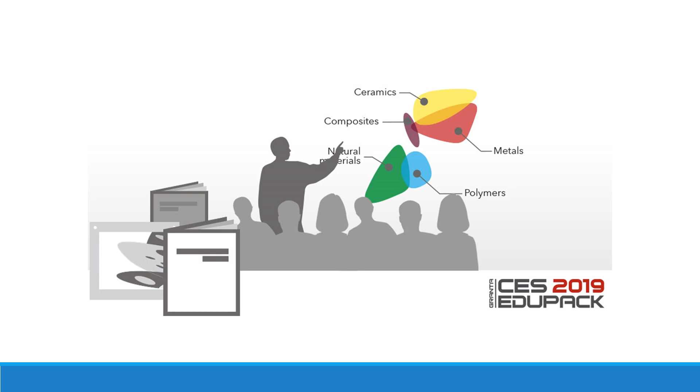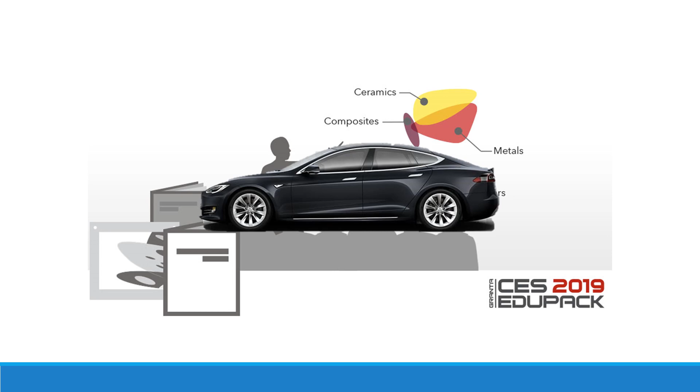Today, we are going to be looking at the material selection process of a part that is present in almost every car, either in the trunk or in the hood. We will go through the functional requirements as well as the intended application for this part that we considered for the material selection. After we reveal the selected material, we will walk you through the specific heat treatments and strengthening processes, as well as the finishings that are beneficial and required for this material.

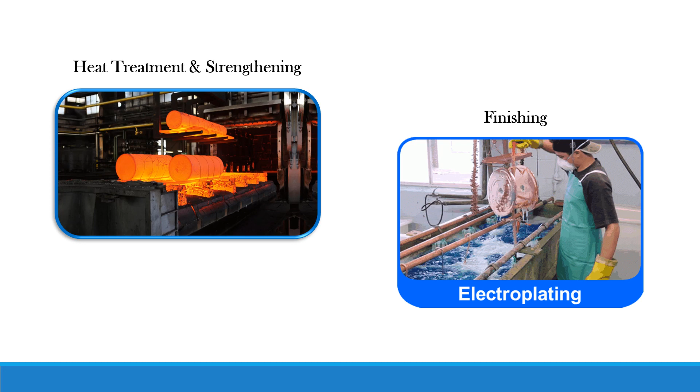The overall aim of this process is to analyze a design in relation to its standard operating environment, as well as the potential for environmental degradation. And this study highlights a thorough material choosing process that culminates in the selection of a material that satisfies the highlighted constraints and will result in optimal functionality of the part.

Under the constraints of transportation, we are going to be looking at the lift support struts that hold up the hatch of a vehicle. These are the gas support rods on either side of the trunk of a vehicle that help open the liftgate so you don't have to do it manually. Specifically, we will consider the gas cylinder that sustains the internal pressure and houses the piston rod. This is the kind of part that might not be obvious at first, but is incredibly important because it is the component that supports the weight of the hatch when it is open.

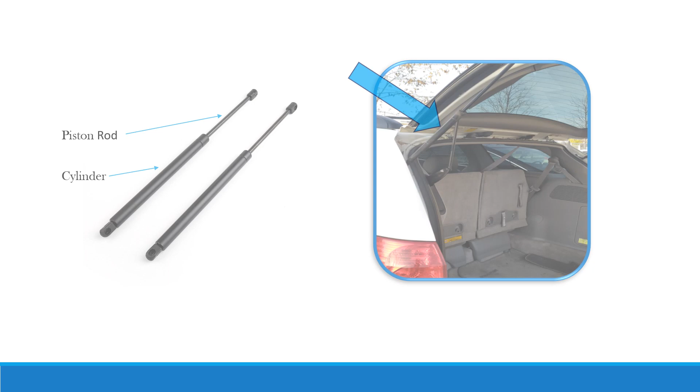In this video, we are specifically going to be focusing on the support strut of a 2010 Toyota Sienna. For some background, this vehicle for this research is currently in Waterloo, Ontario, Canada, and has been parked outdoors for most of its life, surviving 8 Canadian winters. Imagine all the stresses on the material throughout this time.

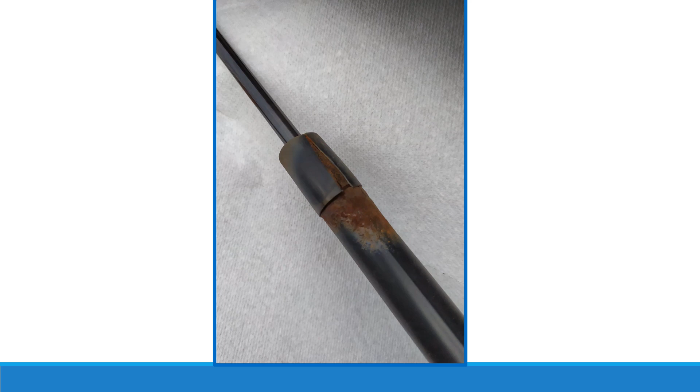This part is mostly made of metal, and since it is directly exposed to the weather, rain and snow when the trunk is open, as well as oxygen, it is corrosion prone, and quite visibly, some key areas seem to have undergone corrosion. In fact, if the corrosion rate is not controlled, it can spread to the rest of the strut, and this drastically reduces its time to failure.

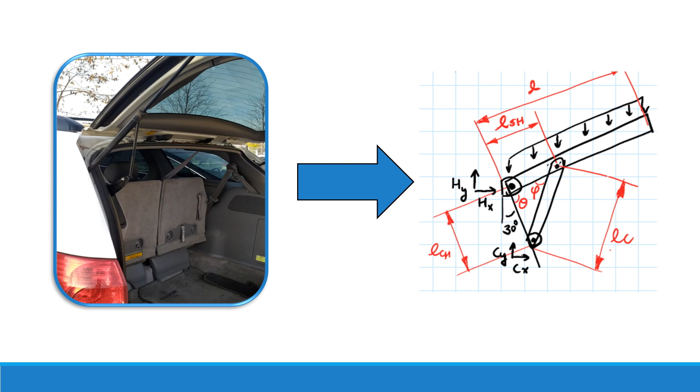As said earlier, the function of this strut involves the mechanical load that is applied at different points on the material. The pressure in the cylinder must then be able to sustain this load. This requires that the material for the cylinder must be chosen appropriately to bear these stresses. Considering the fact that the trunk is supported by 2 of these parts, the force necessary to support the trunk has to be divided by 2, and equations of equilibrium have to be derived so that the system can remain in balance.

To understand the uses of this part, let's take a closer look at the constraints and functional requirements for our design and our selection. First, we have to consider key factors such as the maximum internal pressure the cylinder must be able to contain. We first calculated the force that the strut itself must provide. From the free body diagram of the loading, we determined that this maximum internal pressure should be at least 16.12 megapascals. Also, some other functional requirements include the fact that any cracks cannot move through the part at the maximum stress. The part should not cost more than $1.

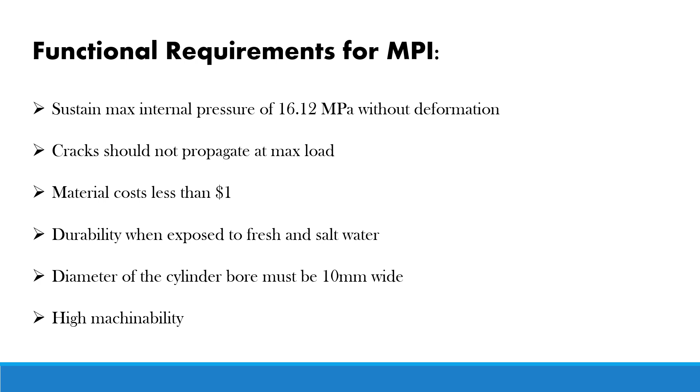The material should have very good durability in fresh and salt water because of the part's environmental conditions, rain and possible road salt exposure. And also the bore diameter of the cylinder has to be 10 millimeters in width in order to properly accommodate the piston rod. Due to the geometry of the chassis, the measurements of the cylinder were also constrained. Specifically, the maximum thickness of the cylinder is 7.5 millimeters.

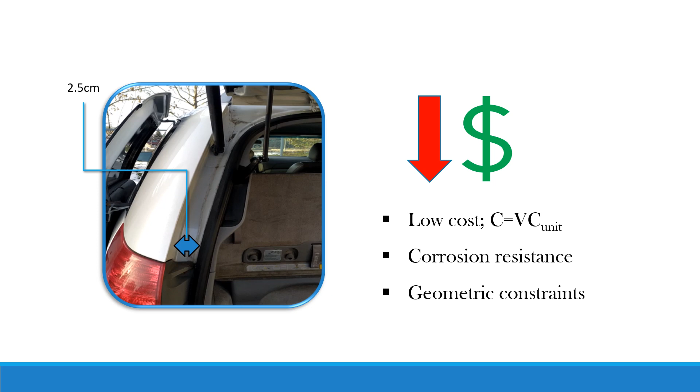Choosing the best material involves a thorough material selection process, and this involves using software such as the CES EduPack database and Ashby diagrams. We decided that the functional requirements that could be demonstrated by a material performance index are the maximum stress in the material and the fracture toughness of the material. The most important objective of this whole process is to minimize the cost of the part as much as possible, and this was done by describing the cost function. Cost is equal to the volume of the cylinder multiplied by the cost per unit volume of the material.

An equation to describe the maximum stress in a cylinder was found as a function of the internal pressure, bore radius, and the thickness of the cylinder. Since the thickness appears directly in the stress equation, and as a result of the volume term in the cost function, it was decided to be the free variable, which ultimately led to our first MPI. We defined this as the cost per unit volume against the yield stress of the material.

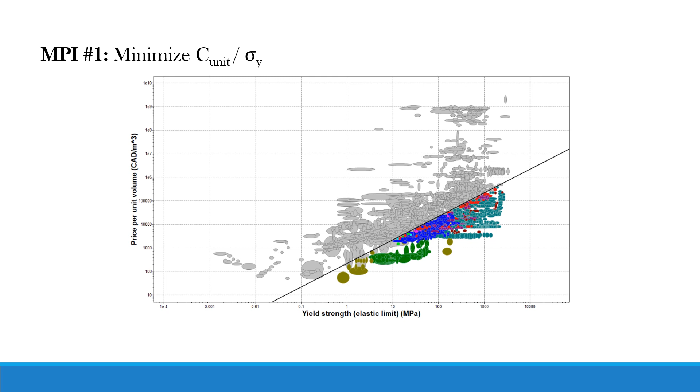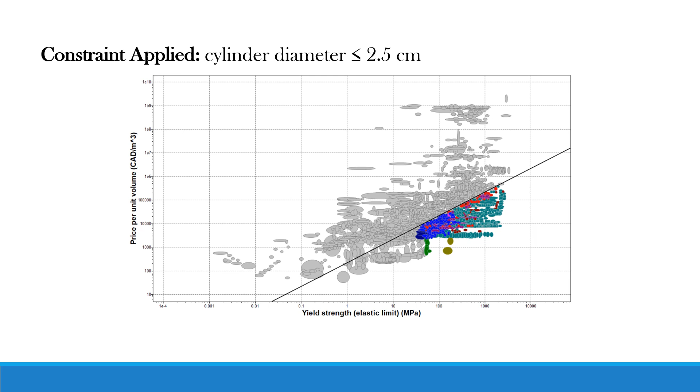In turning our constraints such as the maximum cost, we were left with 1,685 materials for selection. We next added the constraint to the maximum thickness. Using this, we were able to determine the minimum yield strength required. This continued to reduce the number of materials available, and by developing an equation for the fracture toughness in terms of the maximum thickness of cracks, as well as the previous cost function, we were able to develop a second MPI where we defined this as the cost per unit volume measured against the fracture toughness of the material squared.

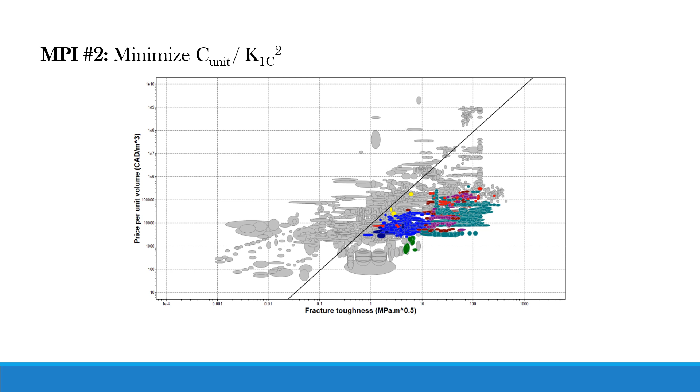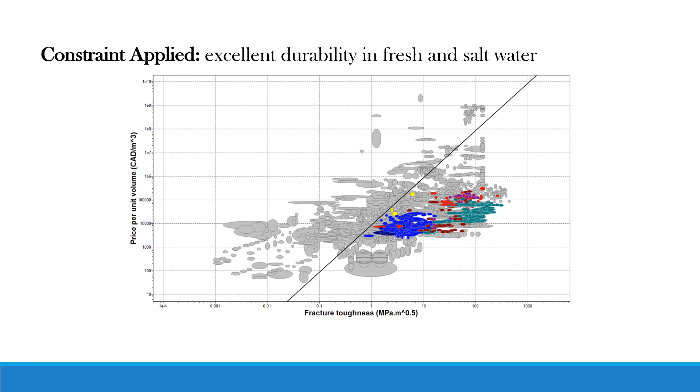With the aim to minimize corrosion, we placed another limit which ensured that the durability of the material in fresh and salt water are excellent. We did this because the part is exposed to moisture and road salt during colder periods. This drastically reduced our options.

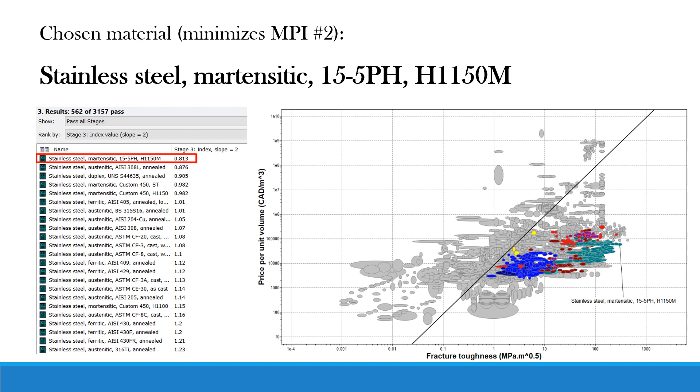At this point, we determined that the fracture toughness of the material was the more important constraint, as it determines the stress required to pose the risk of the cylinder leaking. So, we decided that to account for the crack propagation, the material with the lowest value of the second MPI would be chosen, which resulted in selecting 15-5 PH martensitic stainless steel in the H1150M condition.

With previous research, it was determined that some form of heat treatment would be beneficial for the strength of the part. Considering that the continuous opening and closing of the trunk can lead to fatigue, and that the changes in weather would expose the material to different levels of oxygen and water, increasing the strength of the material will increase the time to failure and also provide us with a more durable material for the hatch.

According to the CES database, the H1150M condition involves solution annealing, age hardening, and air cooling, where the material is heated to bring out precipitates that act as obstructions to dislocation movement, thereby increasing the strength of the material. With the solutionizing stage, where we heat the material to a high temperature, the material should be heated to a temperature of around 1040 degrees Celsius, plus or minus 14 degrees Celsius, for 30 minutes.

As for the quenching, the material should be cooled to below 32 degrees Celsius in order to complete the martensitic phase transformation. The material should now be in a strong but brittle state. Using age hardening, the material may be made more ductile and machinable. To do this, the material should be heated to 760 degrees Celsius plus or minus 8 degrees Celsius for 4 hours and then air cooled. Generally, the age hardening process should allow further diffusion of the atoms.

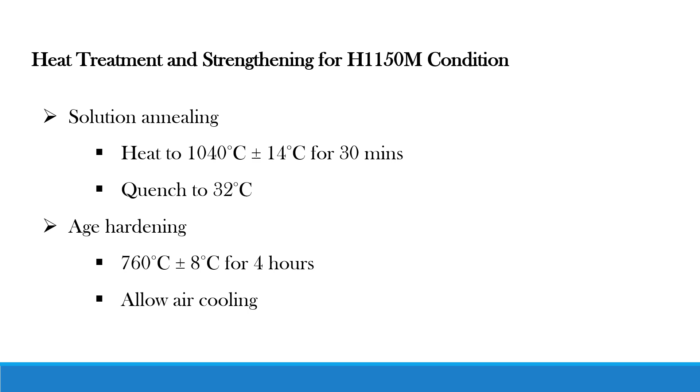Getting a more ductile material comes at the expense of strength, however. Some ductility is useful in this application, as it would give an indication of failure before rupturing. Using the treatment, the specific properties of the material may be controlled, whether that is an improvement in strength or ductility.

For the finishing processes, the original part was finished electrolytically with chrome, which has some advantages. It provides a clean finish, it has good durability, it improves the hardness, and is ultimately corrosion resistant. Another option would have been nickel plating, which provides an equally good finish for corrosion, but the negative side effect is that it tarnishes quicker than chrome. We could have also galvanized our part, but the quality of the finish is not the best and generally looks unpresentable compared to the chrome finish.

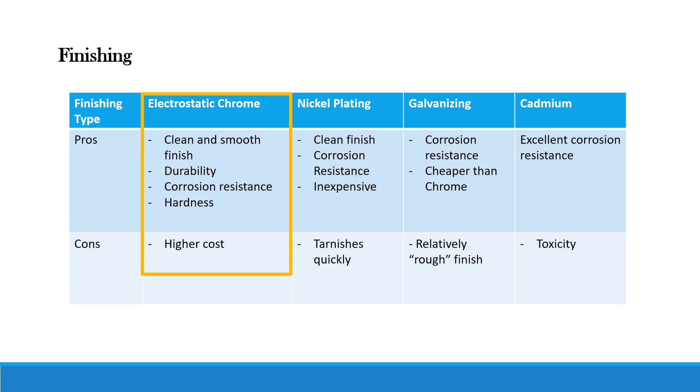Another great option would have been cadmium plating due to its strong corrosion resistance. However, it is not ideal for this application as it is exposed to the inside of the vehicle and is generally a toxic process. With all these in mind, the best option seems to be the chrome finish, and generally, this is giving a black coating.

As an engineer, the control of properties of materials is vital for proper material selection. The extensive processes involved in choosing the optimal material, determined through derivation of MPIs in relation to the functional requirements of a part, resulted in the correct material chosen for the cylinder. With the kinds of innovations that are driving the 21st century, the knowledge of how to critically examine the properties of materials for different uses helps a great deal in proper material selection, not just for the present, but also for a long time.